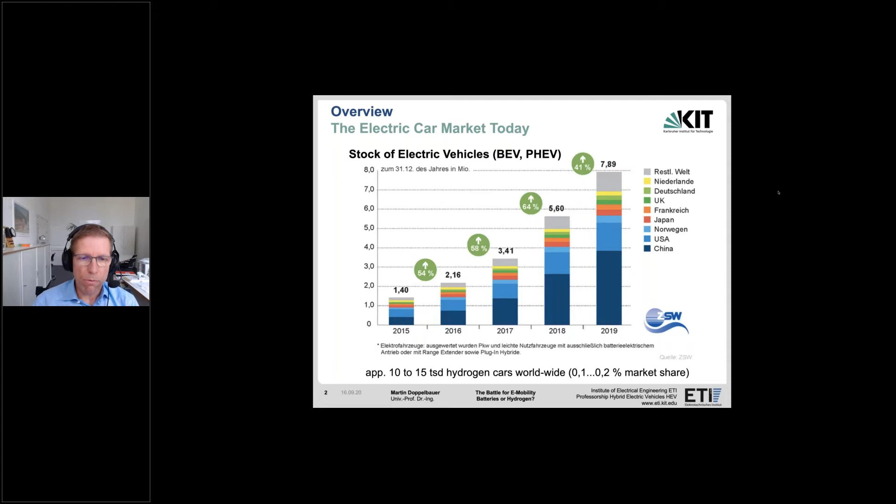Now, what am I going to do with you today? We will have firstly an overview of the energy paths, and then we go into some small details of batteries and fuel cells. I will tell you a little bit about the integration of the technologies into the cars. Of course, we have to look at emissions, CO2 emissions. We will also look at the charging or fueling of the cars. And then I have some examples for you for taxis, buses, and trucks, and a short summary.

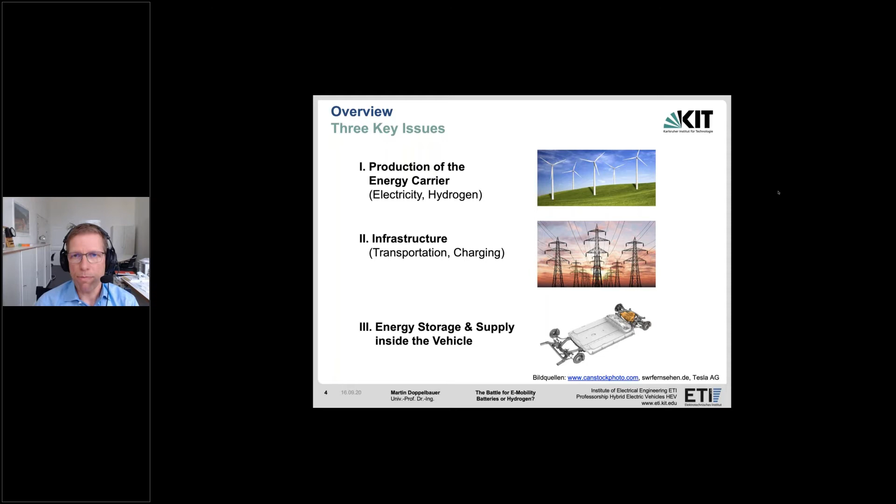If you look at the technologies of cars, for the fueling of cars, it is important to remember that there are 3 key issues that you have to address. The first one is the production of the energy carrier, which is basically electricity first and then hydrogen second. The second issue is the infrastructure: how do you get the energy carrier from the source to the sink, to the car, to the electric drive? That's the second big question. And then, of course, the energy storage and the supply inside the vehicle is the third big key factor. All 3 have to be addressed and compared to understand the technologies better and to know which is best for passenger cars.

Let's start with the energy flow. We're looking from the primary energy source to the electric motor in the car. First, we have the primary energy sources - you all know them: oil, gas, coal, uranium, to wind, solar, and water, regenerative and non-regenerative. Then we convert the energy so that we get electrical energy. That's always the starting point if we want to use electric energy in a car from renewable sources. In case of battery electric vehicles, we then feed the electric energy through the grid, through a charging station, into the battery, into the electric motor system in a car. That's quite simple and quite straightforward.

If we now look at hydrogen, there's a lot of deviation and a lot of additional conversions. We start with electric energy, same thing, but now we have a first conversion and we produce compressed hydrogen, CH2. C doesn't mean carbon in this case, it's just an abbreviation for compressed hydrogen. Compressed hydrogen, as we can see later on, is not suited for an infrastructure of millions of cars. Today, we only have a few thousand, a few hundred cars in each country, so that's not a problem. But in future, if we go to millions of cars, we need liquid hydrogen for storage and transport. So we need liquefaction, which is another conversion, and then we end up with liquid hydrogen that we can store, ship, and send to the fuel stations.

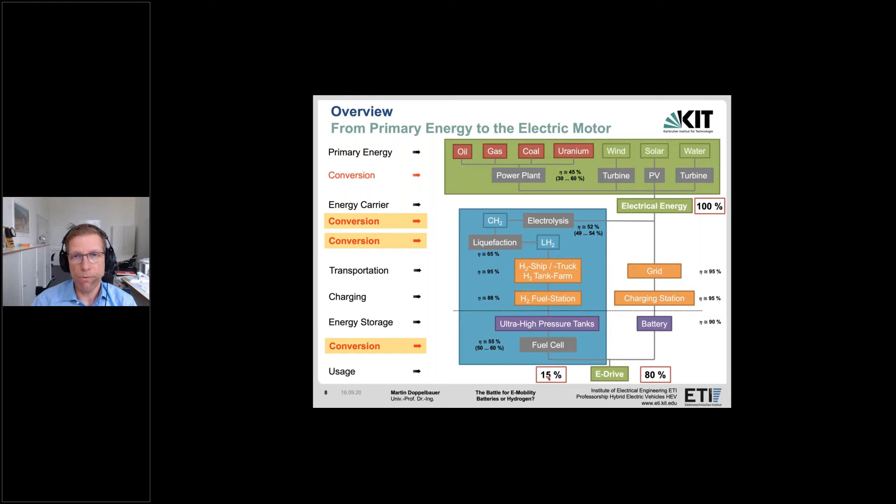Let's visualize this result. Let's assume we have 5 wind turbines in a wind park. If we use battery electric vehicles, then one of the wind turbines is producing the losses that are lost in the path from the wind turbines to the car, to the electric motor of the car. And the other 4 wind turbines are producing the electricity that can really be used at the wheels of the car or at the motor of the car.

Now let's do the same thing with hydrogen. In that case, 4 of the wind turbines are doing nothing but producing the energy that is then wasted on the way to the car. Actually, the last 5th turbine, in part at least, is also producing losses, and just a part of the 5th turbine is actually producing the energy that can be used in the car.

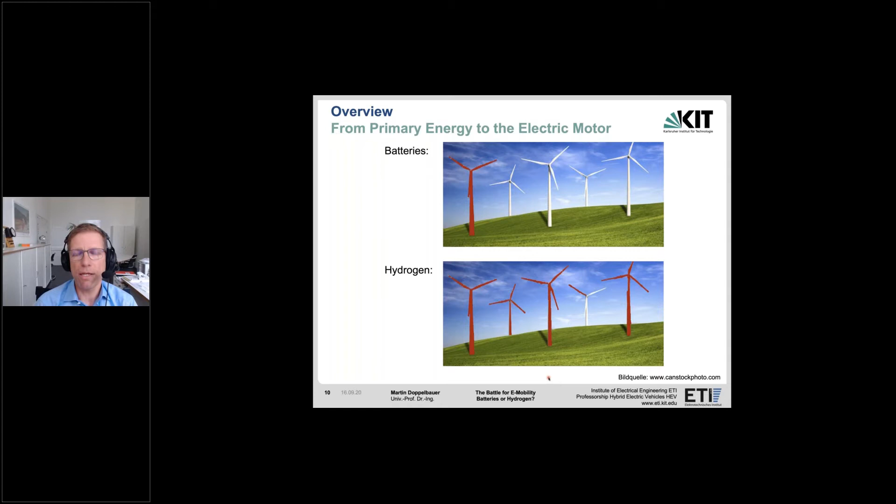Lithium-ion batteries are a relatively new development. The basics were laid in the 1970s to 1980s in Germany, England, and mainly also in the United States. The technology was then sold to Japan because nobody cared in Germany, England, and the US. And the Japanese developed the first lithium cells, prototype cells, in 1985. And the first product that you can see up here is a camcorder by Sony in 1992. The first electric car that was using lithium-ion batteries, the first battery electric modern car, is this Tesla Roadster, and that was released in 2008.

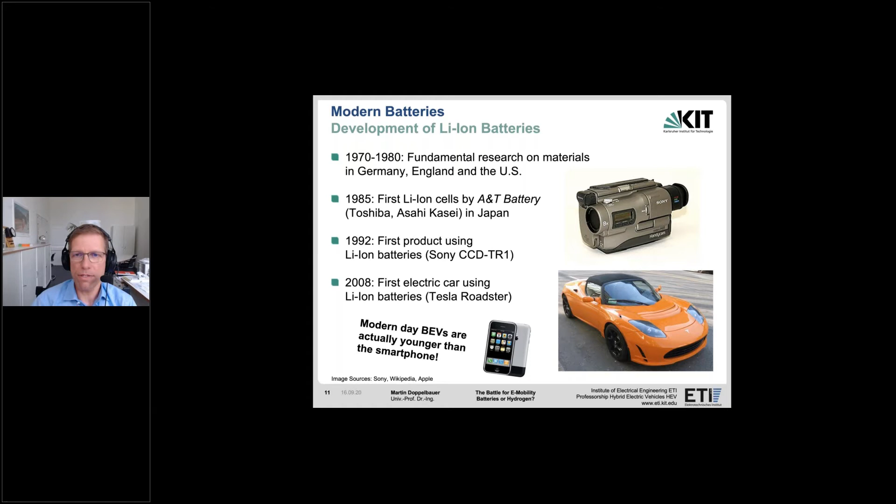So actually, modern day battery electric vehicles are younger than the smartphone. The current day modern smartphone was invented in 2000 or presented in 2007.

Very briefly, I will not go through the details of battery technology. That would be another webinar, of course. But what I want you to understand is that lithium-ion batteries are actually not one technology. There are many, many, many technologies.

We have the anode. The anode is mostly graphite, but it could also be other material. And today we're using graphite in combination with silicon. We have the cathode. The cathode is very different materials: lithium, aluminium, nickel, mangan, cobalt, iron, phosphate, titan, oxygen. There are many different materials that can be used also in combinations for the cathode. Even the electrolyte can be very different and can be made of different materials. It can be liquid, pasty, or it can be solid electrolyte.

And depending on the application, the battery can be very different and can have very different behavior and very different properties. So please don't make the mistake to judge the performance of a lithium-ion battery from the performance of that cheap battery that you have in your cell phone or in your computer and your laptop. The battery performance of the batteries that are made for cars is a very, very, very different story.

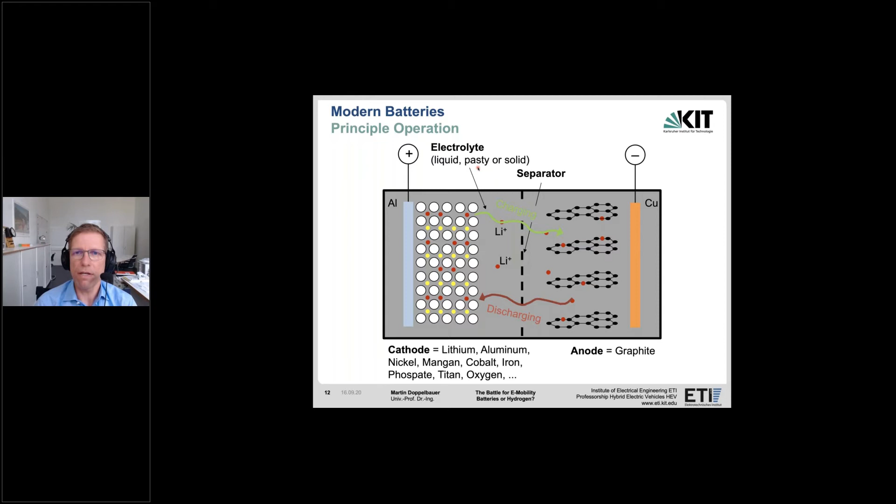Speaking of performance of batteries, there's been a development going on. Many years ago, 10 years ago, the first lithium-ion cars used NCM111. That is a composite of nickel, cobalt, and mangan for the cathode, and all 3 components had approximately equal shares. And then over time, this developed to NCM622, meaning that 60% now of the cathode is nickel, only 20% cobalt. And it gradually evolved into NCM811, meaning that the cobalt part, which is a little bit difficult because cobalt is a costly and also a difficult raw material from the environmental standpoint, is only 10%.

The latest batteries from Panasonic that are used in Tesla cars only have 2.8% cobalt in the cathode. And as you will see also later, in the long run, cobalt will disappear completely from the batteries. It will no longer be needed. Also on the anode side, things have progressed. We're no longer using graphite alone, we're using a composite now of graphite and silicon, which increases the capacity and increases the power density, energy density of batteries.

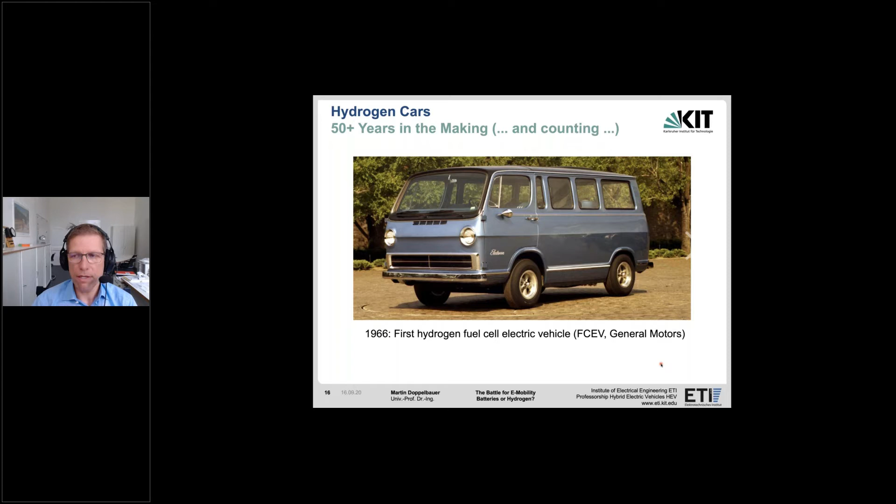This is a very brief overview that should demonstrate the complexity of hydrogen systems. It is not just the hydrogen stack, the fuel cell, which is complex in itself but not so very large. What you also need is everything around that.

You need a cooling system for the summertime, a heating system for the wintertime, a high pressure air pump to pump the air into the stack, various filters and dosing valves, and a high voltage battery.

Did you know that hydrogen cars cannot run without a high voltage battery, typically lithium batteries? This is because hydrogen cars cannot recuperate, they cannot regenerate energy fed back from the braking process, and they also cannot start in the cold with the stack, they need energy to start the stack. So there is a high voltage battery in each hydrogen car.

Also, the power electronics is much more complex. You need this additional DC-DC converter. In battery electric vehicles, you only have half of the components, just this DC-AC converter and not the DC-DC converter.

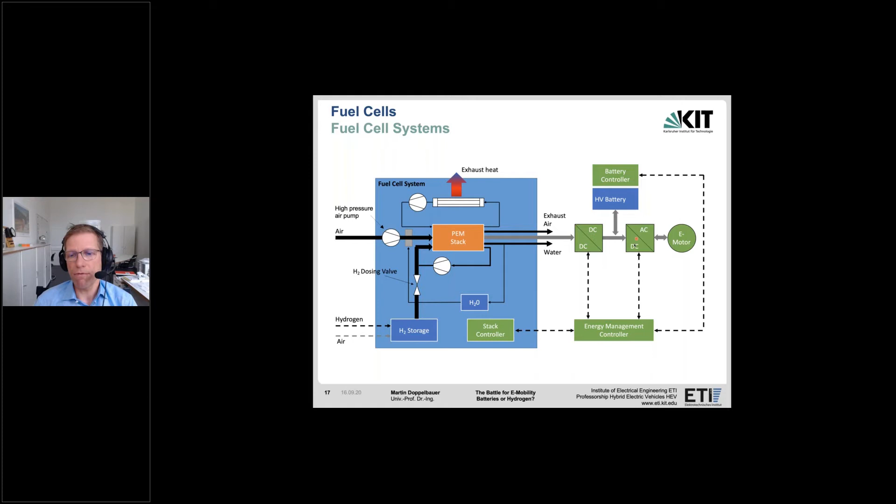The extra weight of the hydrogen system here is 355 kilograms, and the extra weight of the battery system is 480. But considering the driving range, this is 83 kilograms per 100 kilometers, and on the battery side, it is 86. So practically the same. However, this is measured according to WLTP, and the fuel cell car is measured according to the new European driving cycle.

We all know that NEDC driving ranges are much more loose and unrealistic than WLTP. So realistically speaking, the energy storage weight of the battery electric car is already better, the cars are already lighter than hydrogen cars.

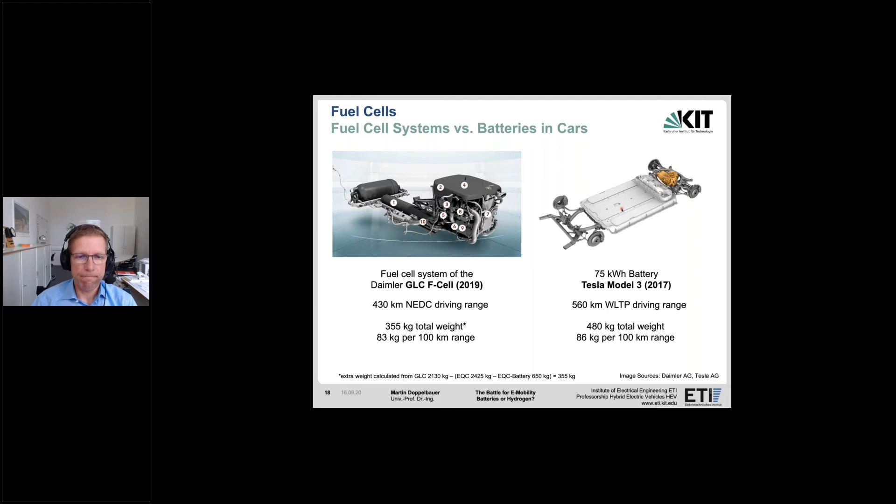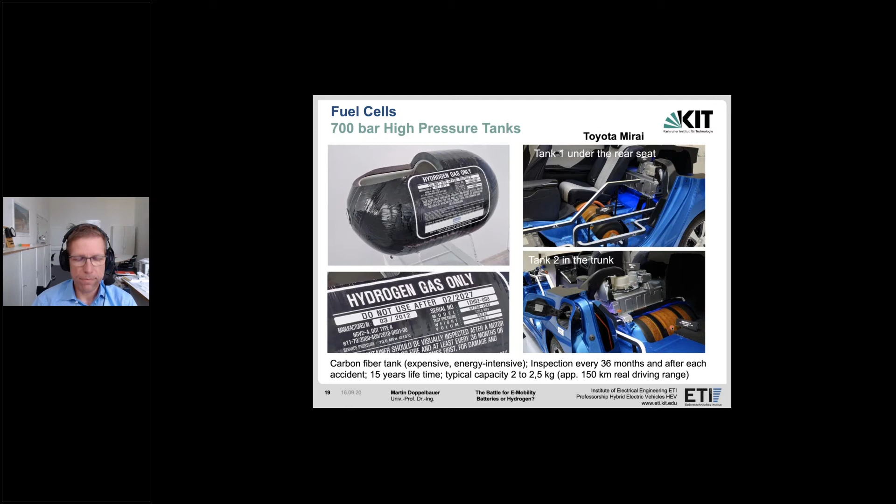The integration of batteries into electric vehicles has a lot of advantages compared to combustion engine cars. There are basically two headlines to remember. The first is the so-called cab-forward design: because you have so little technology that needs to be integrated in the front, you can shrink the overhang and make it shorter, bringing the passenger cab much further forward. The other is the skateboard design, where the battery is basically in the ground of the car, providing extra weight and getting out of the way of the passengers.

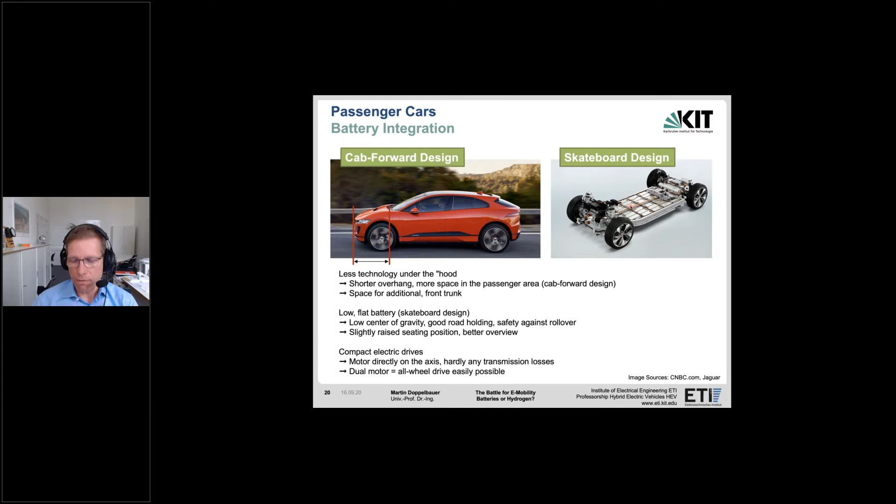Let's compare the Hyundai Nexo and the Tesla Model 3. The Hyundai Nexo is the most modern hydrogen car. Actually, there are only two hydrogen cars available in the world: the Hyundai Nexo and the Toyota Mirai, so the choice is not so big. I compared it to the Tesla Model 3 because it's practically the same length, just 2 centimeters difference. Already on the outside, you can see the Model 3 has a much shorter front overhang, giving 20 centimeters more cabin space. That doesn't seem like much, but it's actually the difference between one class of car and the next higher class.

You may have heard of Volkswagen. They advertise their new ID.3 electric car as having the same outside dimensions as a Volkswagen Golf, but inside dimensions similar to a Volkswagen Passat. That's just because of this cab-forward design.

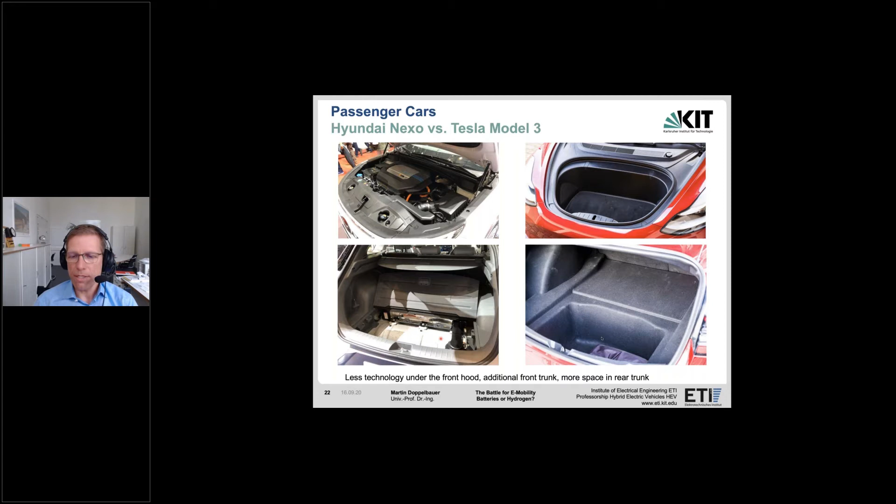Let's look at the rear trunk. Again, with the Hyundai Nexo, you can see there's a big torpedo-shaped tank underneath the trunk, so the trunk itself is smaller because you need the space for it. Here's the same picture of the Tesla - where the torpedo was, you now have a big additional compartment. Tesla calls it a well.

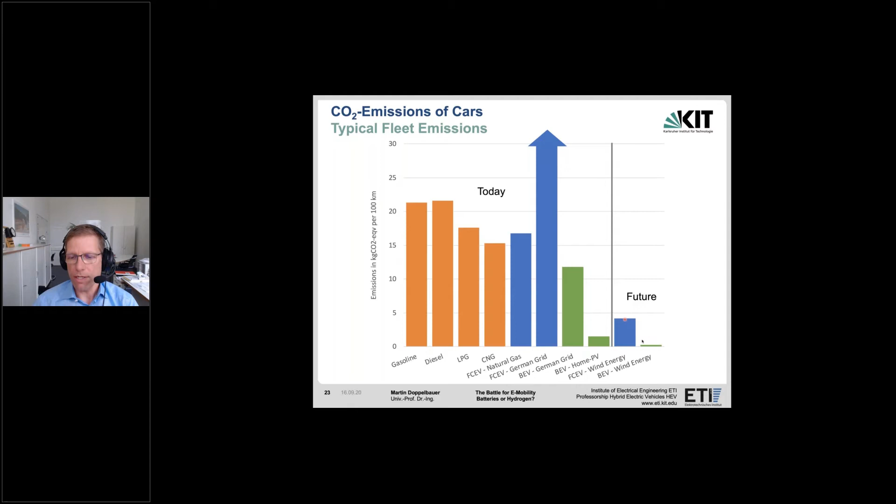If you produce hydrogen from the current electricity grid in Germany, which still has a relatively bad CO2 emission factor, the emissions would be horrible, but I don't think anybody is going to do that. Now, if you use that same German grid electricity for battery electric vehicles, because the efficiency is so much better, the emissions are much lower - this is the typical situation today for battery electric vehicles charged from the grid. If you use a home photovoltaic system, the battery electric vehicle is even better than anything else, but it's already much better using grid electricity. In the future you'd probably use wind energy. Again, because of losses and waste, fuel cells have much more losses and emissions than battery electric vehicles. Of course, emissions during the operating phase are not everything - we also have to look at production, the backpack.

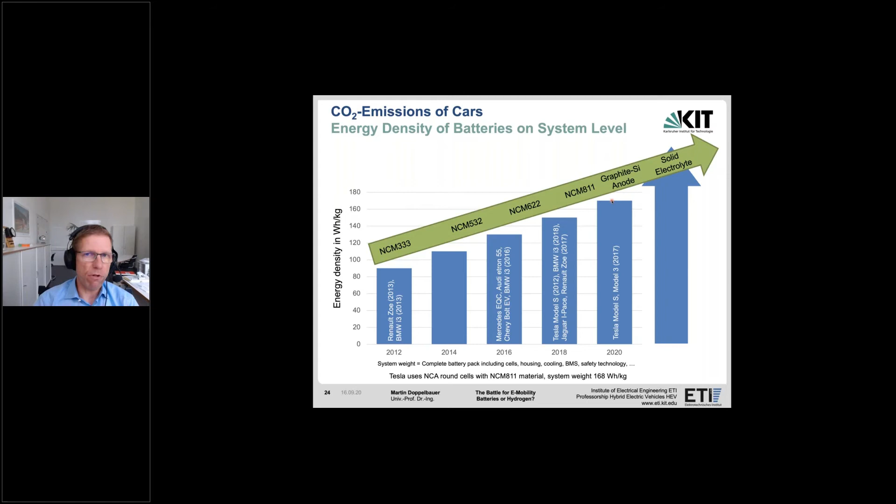One thing to consider is that battery electric cars have increased and improved their energy density, measured in watt hours per kilogram. That has improved a lot in recent years because battery technology has been evolving rapidly, leading to much reduced emissions in the production phase of batteries.

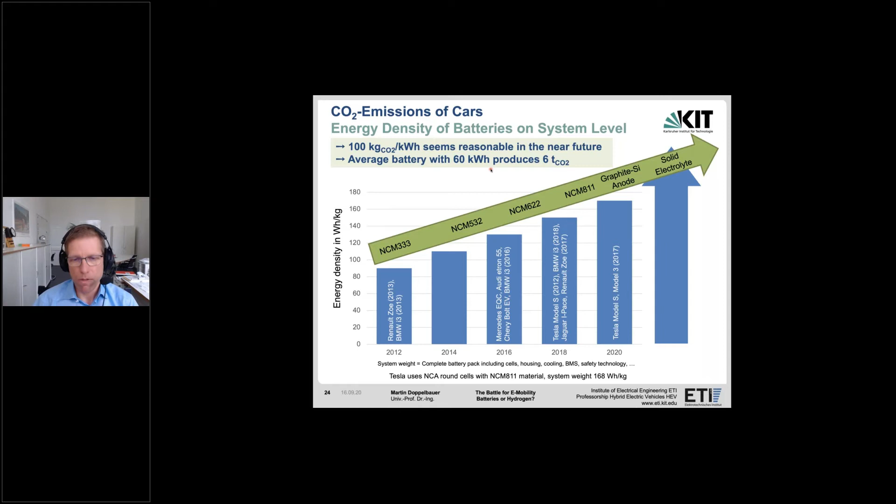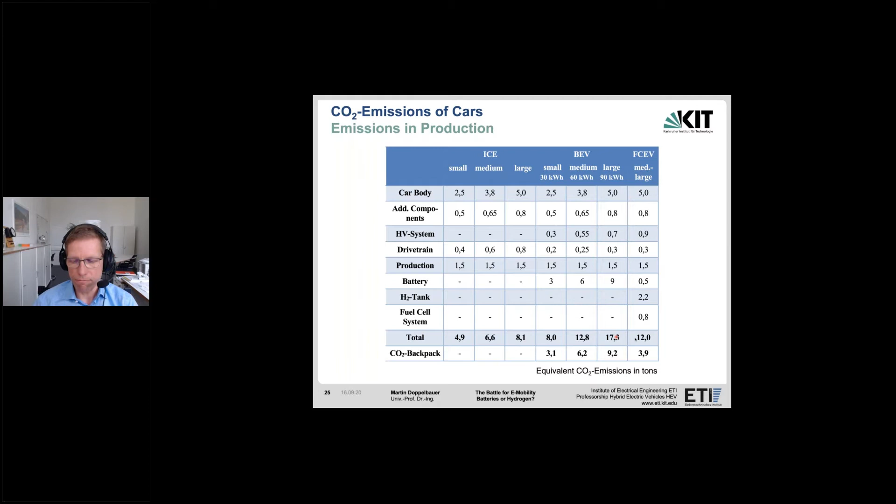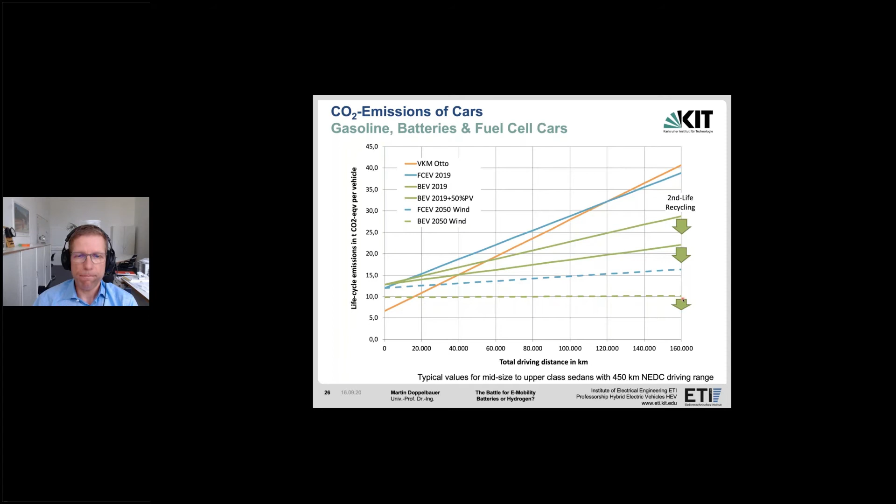Let's go to charging very briefly. I want to inform you about the situation. Charging in Europe, at least, also in Japan and China, is now at highways going to fast charging. We have fast charging stations available in Europe alongside many highways. It's going up to 350 kilowatts per charging pole, which is quite a lot, even though we don't even have the cars for that.

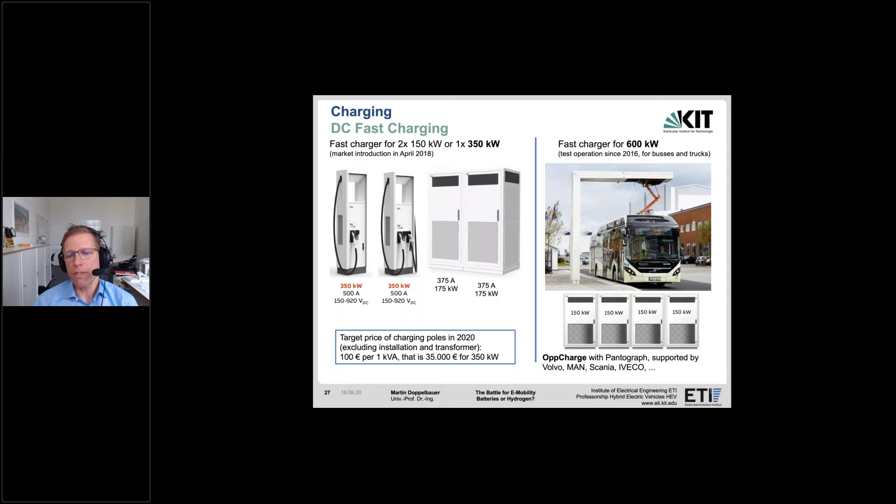For buses, there are several systems being tried out right now. This is mass production right now, this is rolled out in the world, and this is just the prototypes. There's this OppCharge standard that can go up to 600 kilowatts for buses.

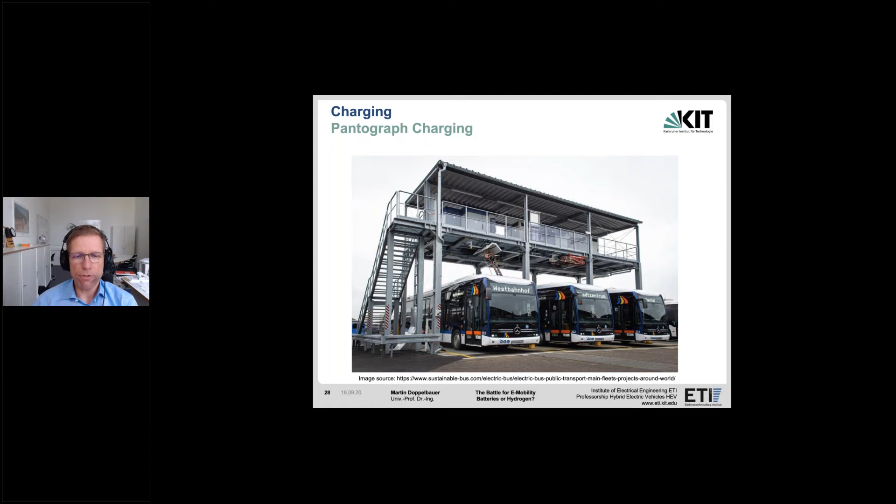This is a picture of a station, I think it's in Bern, Switzerland, which is using this. So it's not for driving, the buses are just standing there and charging while they're standing. This is just to replace the plugs, but the charging standards are developed further.

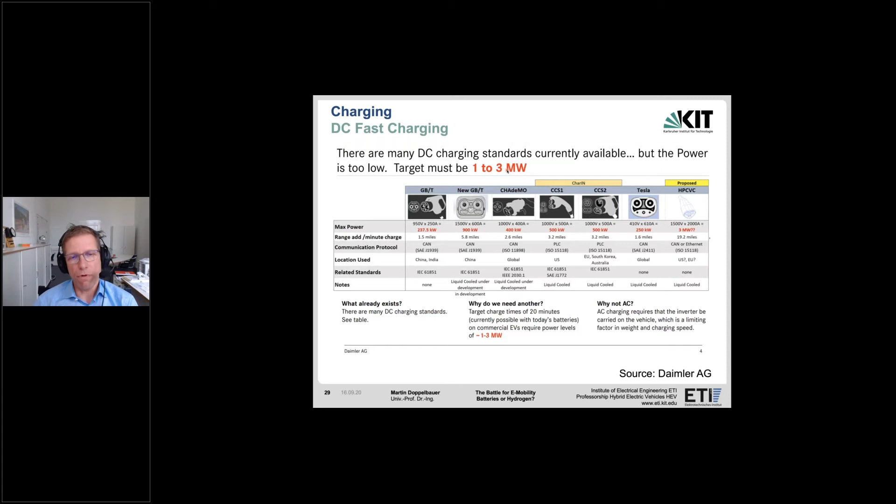The next step will be high power charging up to 3 megawatts, possibly even higher for trucks. It's already being discussed to go up to 4.5 megawatts charging power for trucks, so they can charge up in 20 minutes as well.

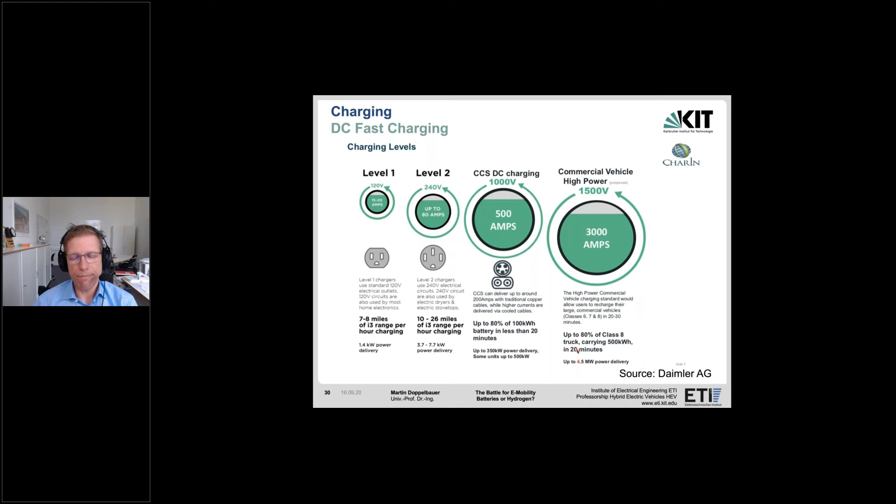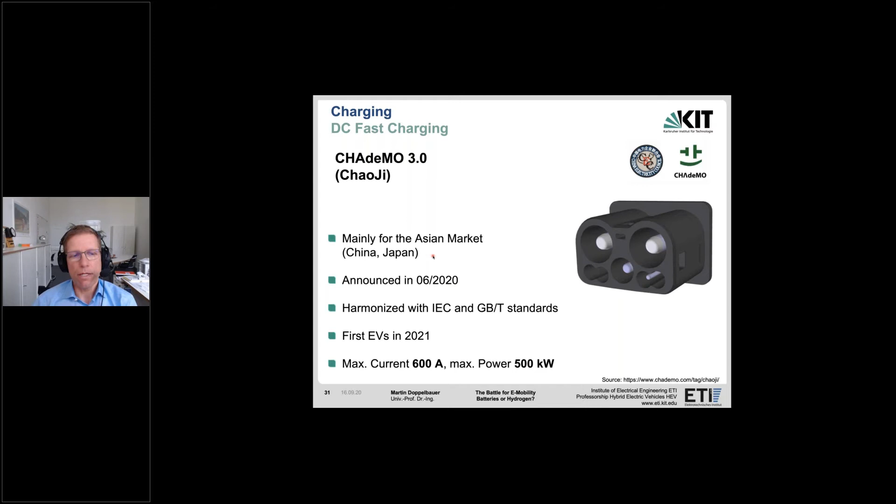Interestingly, also in China and Japan, fast charging standards are continuously being developed. Just a few months ago, the CHAdeMO 3.0, or as it is called, ChaoJi standard, has been introduced. It will also go up to 500 kilowatts. It's mainly for the Asian market, deployed in China and Japan, and the first electric vehicles are expected next year.

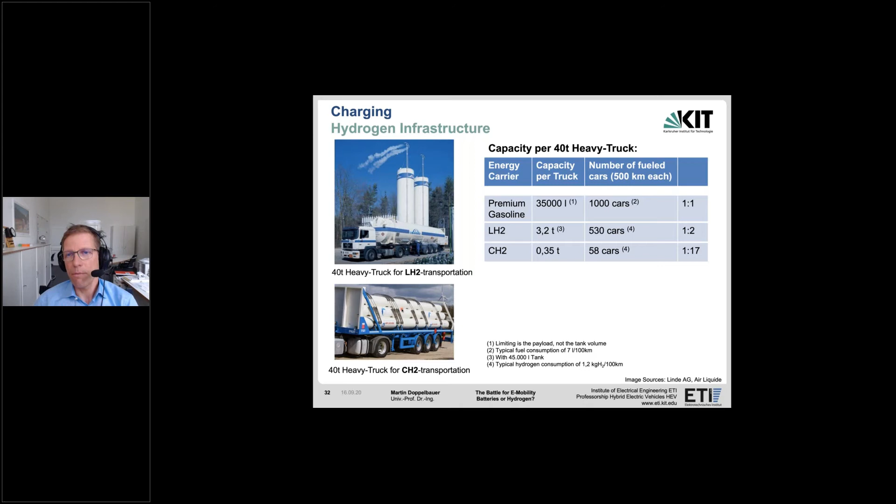And remember, liquid hydrogen is very, very cold, so this is a very expensive technology. If we use compressed gas, compressed hydrogen, we can only feed 58 cars from the same 40-ton truck. So this is nice for prototypes, but completely impossible for the mass market.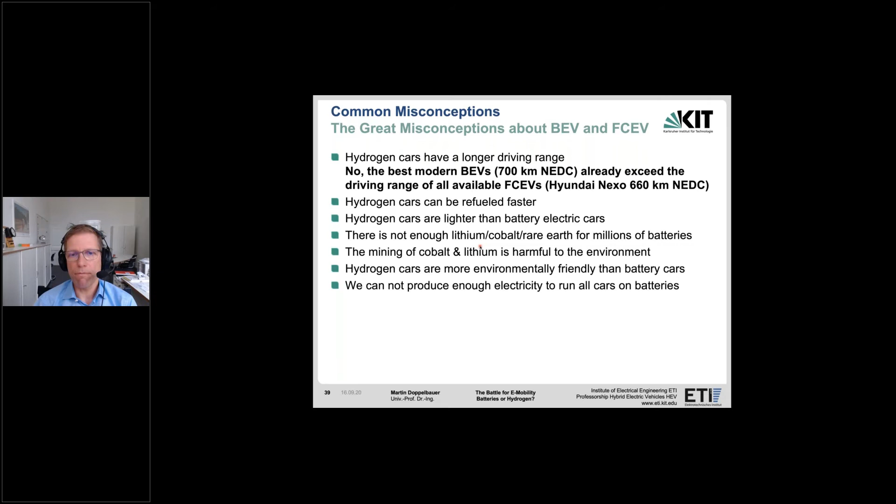Hydrogen cars can be refueled faster - well, you've seen the difficulties before, mostly this is not the case. And you have to understand that most charging processes, depending on your use case, 90 to 95%, are going to happen during non-productive times - overnight, while you're shopping, while you're at work. So the charging time doesn't matter at all.

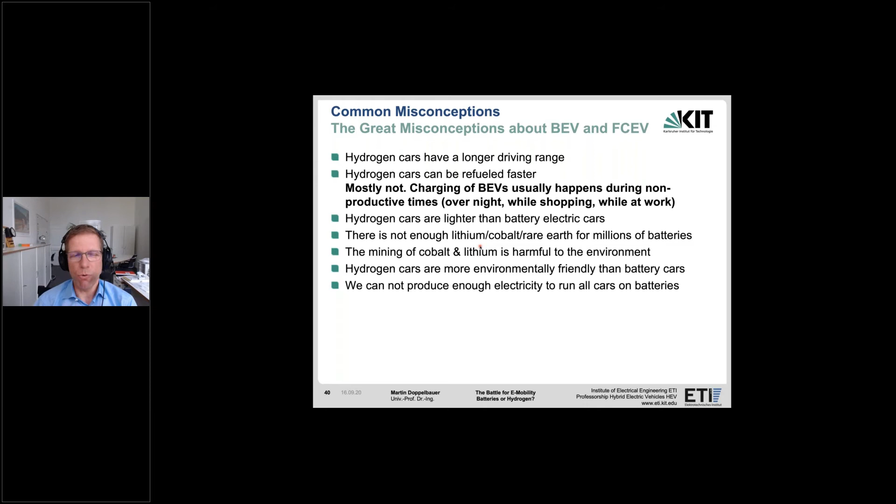Hydrogen cars are lighter than battery cars - no, they're not, we've seen it already. The added weight of fuel cell systems, including all the auxiliary devices, is now similar to that of batteries, and batteries are getting better. So in the near future, battery cars will be lighter than hydrogen cars. Today, they're about the same.

There is not enough lithium, cobalt, rare earth material for millions of batteries - no, that's also not true. The only special raw material that's really needed is lithium. There is no rare earth material in batteries, and cobalt, as we've seen, is used less and less. And by the way, did you know fuel cells also use cobalt as a replacement for platinum, and platinum is even more expensive and even a more critical raw material.

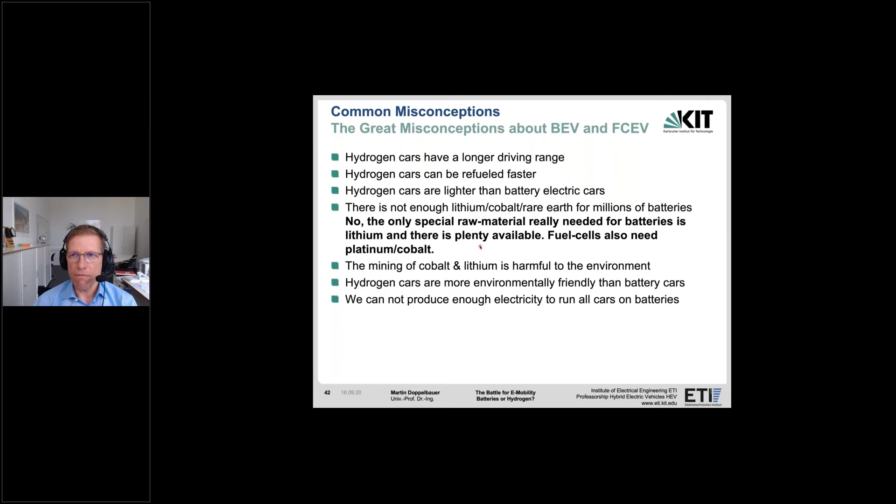The mining of cobalt and lithium is harmful to the environment - actually, no, that's not true. Even though you hear it very often, cobalt will hardly be needed in new batteries, and it is needed in fuel cells, so that's the same thing. And today's share is already greatly reduced. And lithium exploration with modern technology is not more harmful to the environment than any other industrial raw material.

I've not been going into the details on this, but I have tons of material if you want to know the details. So, hydrogen cars are more environmentally friendly than battery cars - and they are not, due to the tremendous waste of electric energy and the large industrial installations that we need for the production, storage, transport, and fueling of hydrogen. Actually, battery electric vehicles are more environmentally friendly, I'm sorry.

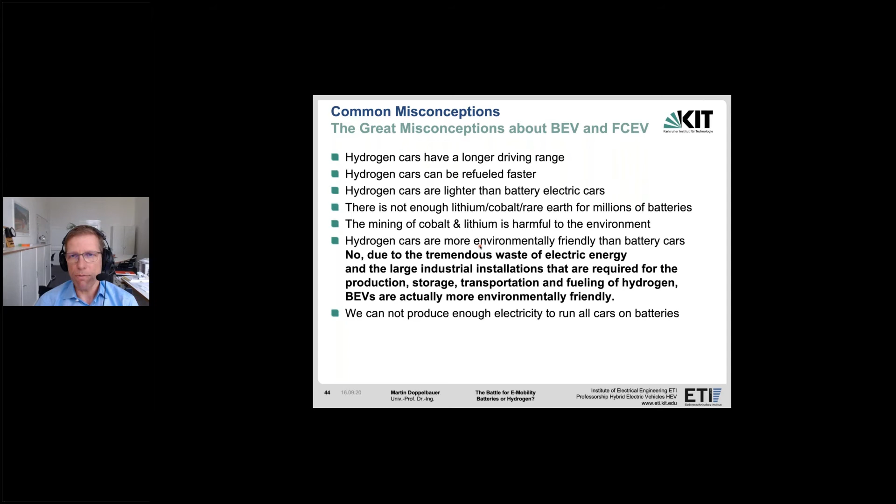And then the final point that you often hear as well: we cannot produce enough electricity to run all cars on batteries, which is not true. I have an example for Germany - we would need only 20 to 25% more electricity to run all the cars in Germany, which are 47 million, on battery electric. And 20 to 25%, let's say over a time of 20 to 25 years, is a relatively simple thing. Actually, we would need much more electricity to feed all these cars with hydrogen.

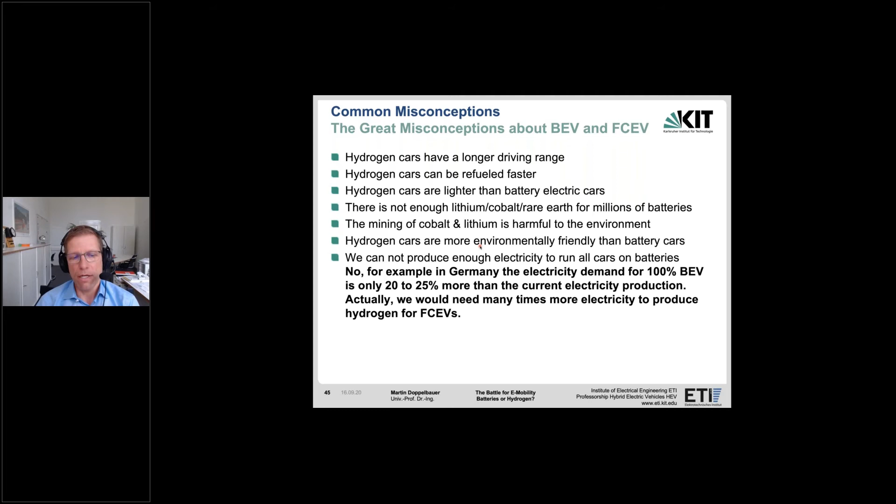So in the end, as I said in the beginning, to close the circle, I don't think it's a battle really. For cars, the thing is very clear: hydrogen technology is not good for cars. It is useful for large installations in industrial and professional environments. Hydrogen will be used for long-term storage - that's its main application - power-to-X installations, maybe aviation, ships, industrial process heating, everywhere you have small power-to-energy ratios, where the C-rate is much lower than 1.

Battery technology, on the other hand, is useful for small and mid-sized installations, including mass market applications, where we have a high output power demand and a high power-to-energy ratio, the C-rate much higher than 1. Typical applications are consumer electronics, cars, buses, light trucks, and possibly also heavy trucks.

That was very briefly what I wanted to show you today. Thank you for your interest. As said before, I have a book that's brand new, only in German language so far, I'm sorry. If you're interested, you can read many more details in that book. Now I'm open for questions.